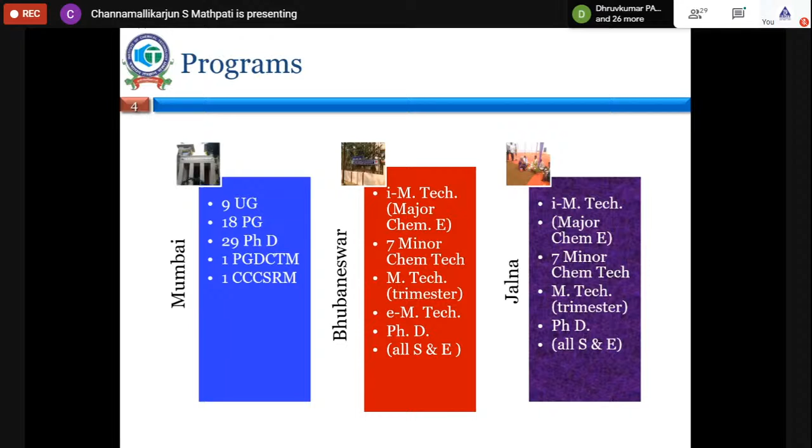This is a brief background about our institute. For more details, you can visit our website. Now let us come to the topic.

Today we are going to discuss the CFD application in multi-phase flows, and we are already on the 4th day of this particular workshop. All of you know what computational fluid dynamics is and its applications as well.

I'll just briefly start by saying that computational fluid dynamics is a study of fluid flow and heat transfer, and if you want to do multi-physics type problems, you can also incorporate chemical reactions and surface activity like interfacial tension. So there can be many complexities added into a CFD framework.

Why is CFD popular? Because it is a numerical experiment that we are performing, so there is no need for hardware infrastructure. Having a hardware infrastructure and doing experiments is going to be time-consuming and, economically, not a cheaper option to conduct.

So CFD can be a very promising alternative tool to reduce the number of experiments. But we cannot say that experiments can be completely avoided just because of the complexities in fluid flow systems.

CFD has progressed over the last few decades, thanks to advances in supercomputing and numerical schemes. Without improvements in supercomputing, the CFD field could not have progressed to the extent it has in the present day.

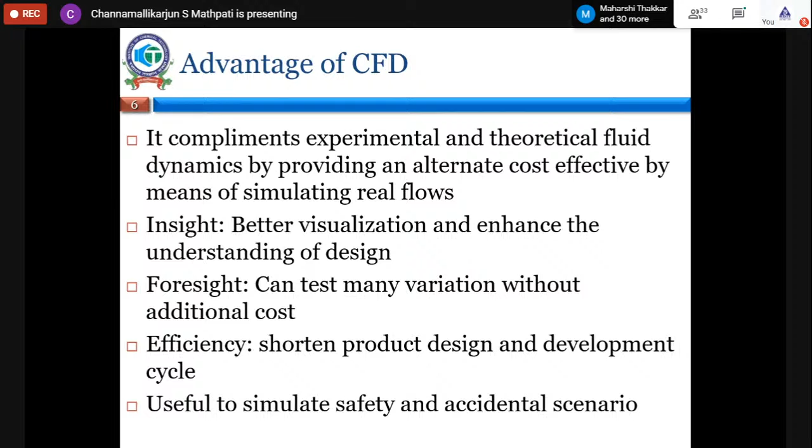In chemical engineering, computational fluid dynamics is mainly used for flow problems such as distribution of liquid in a reactor or a network of piping systems, understanding pressure drops in the system, evaluating and quantifying drag forces, and the non-idealities in the system.

There might be certain zones which are not at all moving. If you consider flow past a backward step, a very simplified flow, on the wake or backside of the step you can see a swirling flow, and in the middle and at the corner there can be a stagnant zone which is not at all getting mixed with the bulk of the flow.

There can be flow situations such as channeling and residence time distribution. Consider a column packed with certain packing or beads, and if you put a liquid or gas in that, our expectation is that the entire amount added as a pulse should come out as a pulse at the end of the column. There should not be any non-ideality in the system.

But any real life system with finite viscosity, when you add a pulse, it will come out like a Gaussian curve—there is a spread. Quantification of such spreads is very essential in reliable design of equipment. CFD can also handle reactive systems and particle dynamics.

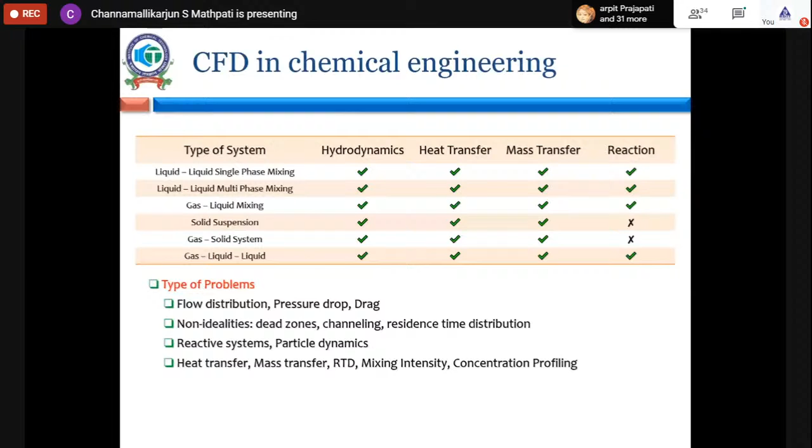When we do any CFD modeling, we essentially do it in three steps. The first is the pre-processing step, in which we define our computational domain. For any particular task assigned to us, we make certain assumptions, and based on the assumptions and required details from the flow field, we decide the boundary of our domain.

For example, I am working on a gasification system, a circulating fluidized bed gasifier. My domain extent will be just the circulating fluidized bed gasifier. I am not going to account for the compressor giving gas into the system, or the pneumatic transport of solids putting solids into my system. My focus is only on the gasifier equipment. That is how we decide our geometry.

Then we decompose our geometry into multiple grids—that is the grid generation stage. Then we give the boundary conditions and decide the physical and chemical phenomena to be modeled in the system. All these activities may take about 20 to 50% of your project time.

The next step, which is more time consuming, is once you have taken all these decisions, the computer has to solve those equations. The partial differential equations are converted into algebraic equations when doing computational fluid dynamics, and those equations are solved using iterative methods. These iterative methods actually take up a lot of time, and after the solving stage is completed, you have a converged result.

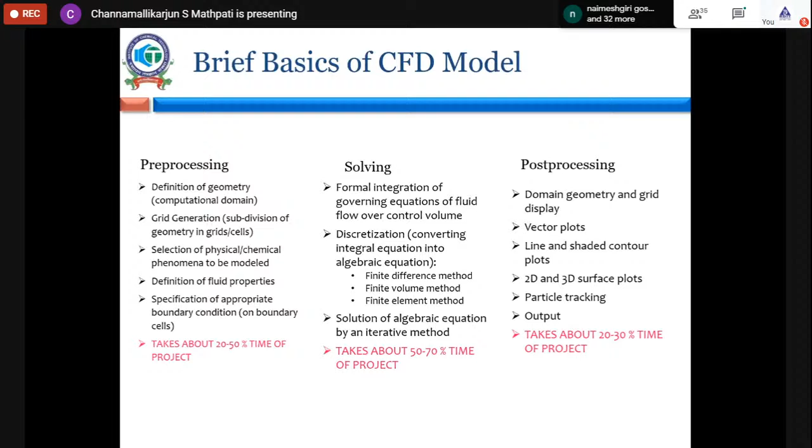As we have discussed, there can be different types of multi-phase systems, and in chemical engineering you can see various equipments being used. It can be a reactor or a distillation column, or a boiling system, or a vapor compression system. There are many systems in chemical engineering and chemical industry which essentially involve multi-phase contacting. These systems need to be designed appropriately in a safer manner so that we can have consistent product quality, as well as more throughput from such equipments.

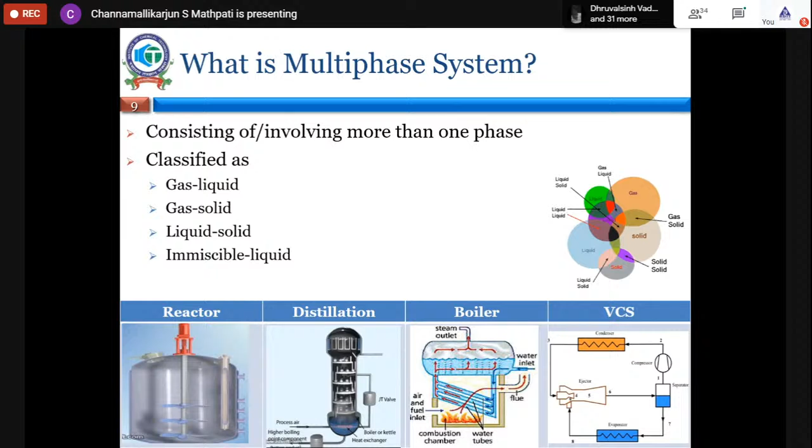All multi-phase flow systems have different flow regimes based on the properties of the gas, solid, and liquid phase, as well as the operating conditions. So if you consider a gas-solid flow, if you have a very low gas velocity through the bed, then it is just a fixed or packed bed type of system.

If you slowly increase the velocity, you will see gas bubbles coming out from the system. If you further increase the velocity, rather than bubbles, there are slugs moving in the system. If you further increase the gas velocity, you enter into turbulent as well as fast fluidization. If you go to the other extreme, the particles rather than remaining in the system just get pneumatically conveyed with the gas phase, since the gas has sufficient momentum to take away all the particles from the system.

So we need to understand exactly under which flow regime we are operating, and whether operation under that flow regime gives us benefit in terms of improved transport phenomena.

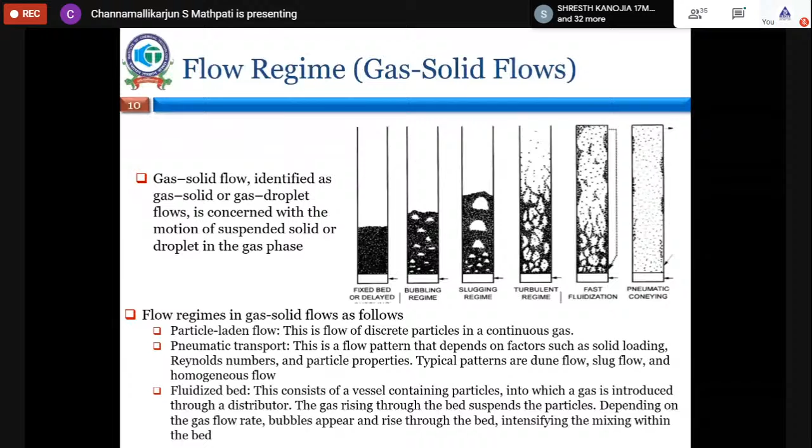Another system is gas-liquid flow. Again, there are different flow regimes like bubble flow, slug flow. There can be stratified flow, dispersed flow. Based on the flow conditions and material properties, you can get into various flow regimes, and all these flow regimes have completely different pressure drop characteristics, as well as different contributions to overall heat and mass transfer.

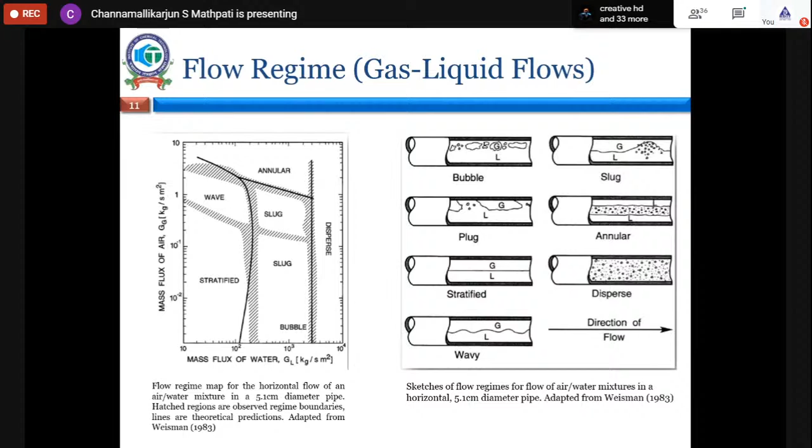So what are the various ways by which multiphase systems are modeled in computational fluid dynamics? The primitive way of handling multiphase systems is using empirical correlation.

Consider I am trying to design a fluidized bed system. To design it, I will use the Ergun equation and apply the force balance in terms of weight and pressure drop, and then derive the equation for minimum fluidization velocity. Once I derive that equation, I will decide my operating velocity as 2 or 3 times the minimum fluidization velocity. Based on the velocity decision and the total flow rate we are handling, we get the diameter of the column. Then based on the bed expansion characteristics and certain extra height, we decide the height of this fluidized bed reactor.

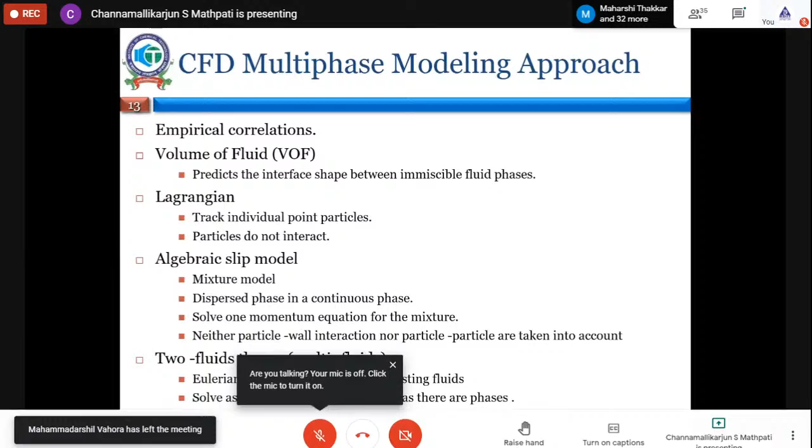So this is an empirical way of dealing with this problem. Another case is when a gas is going to fluidize my particles, and I want to see how the gas bubbles or slugs are moving in the system, so I want to track the interface between the solid and gas.

This interface tracking is done through a method called the volume of fluid method. This method tries to capture the interface between the gas and solid, and tracking the interface demands a very fine grid and very small time stepping. So a simulation using the volume of fluid method can give very good information about the system, but the problem is it may take a couple of years to solve for an industrial scale reactor, which is not the promising time scale that we want.

Hence we do some approximations about the system, and these approximations can be based on the percent of solid concentration in the system. There are two extremes: one is you are handling a dilute system, and the other extreme is you have a dense bed system.

If you have a dilute system, then for the gas phase you solve the Navier-Stokes equation, and for the solid phase you solve Newton's law. So what you are doing is tracking each and every individual particle in the domain, and tracking every individual particle while solving the gas phase as a continuum is a Lagrangian type of approach.

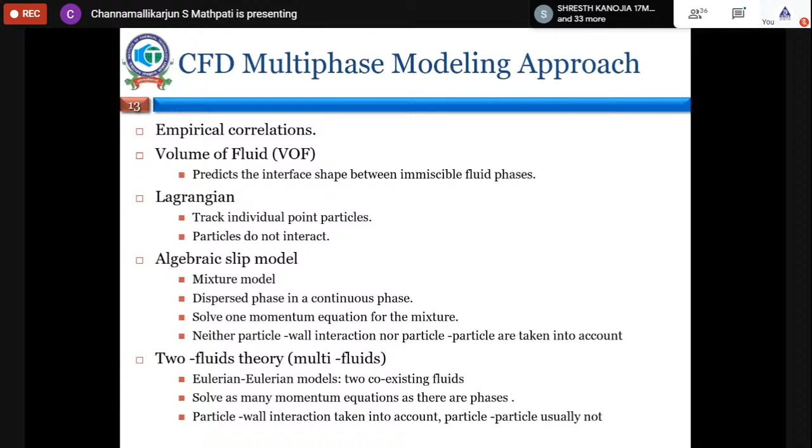The Eulerian-Eulerian framework is mainly used in most CFD multiphase applications. Its features are that you use a single pressure field for both phases, or any number of phases in the system. So you don't define pressure for the solid phase and gas phase separately. You only have different velocity variables for gas and solid, but pressure is common.

You use interphase drag formulations, and in few cases you may also want to include the virtual mass effect and the lift forces.

In case of a gas-liquid system, the gas bubbles can get drifted in the radial direction as well, and this drifting is actually due to the lift force. Whenever these bubbles are moving upwards, in their wake, that is the backside of these bubbles, they also get some liquid attached, and this liquid wake is also moving with the bubble.

So under such gas-liquid systems, these forces are important. Then you can also add additional complexities, such as species transport or reactions taking place, and you solve the system. Once you solve these systems based on the velocity and pressure information, you can get design parameters such as heat and mass transfer coefficients. If the system is turbulent, then you also add the turbulence equations in addition to the continuity and momentum equations.

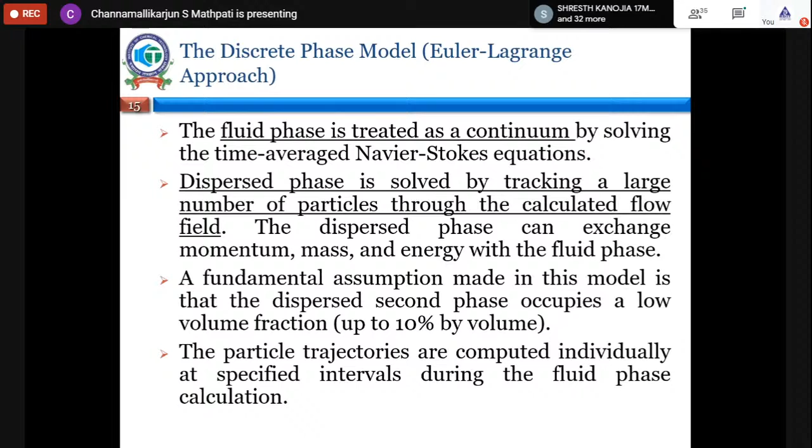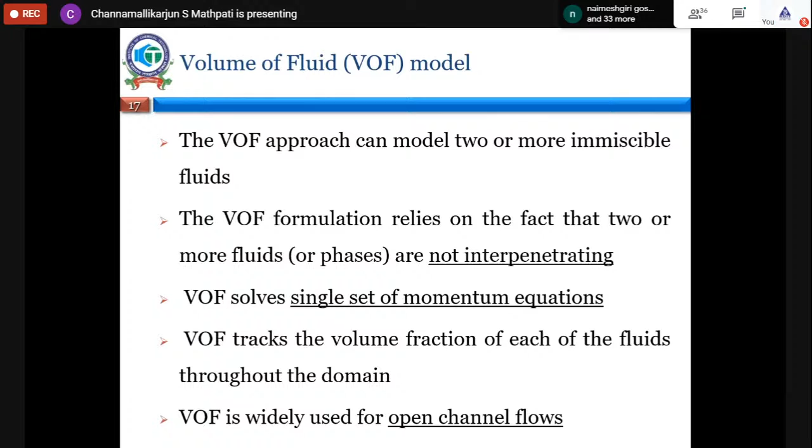In case of VOF, what you do is consider that both phases are not penetrating into each other, and you solve an additional equation which tracks the interface of the continuous and dispersed phase. So VOF solves a single set of momentum equations, but it solves an additional equation related to the interface.

So if epsilon k is 0 in a particular cell, it means only one fluid is there. If epsilon k is 1, then the other fluid is there. And if it is between 0 and 1, then both phases are present in that cell. So you solve for each and every cell in the domain, whether gas is present, liquid is present, or both are present, and if both are present, what is the proportion. Based on that, you track the interface.

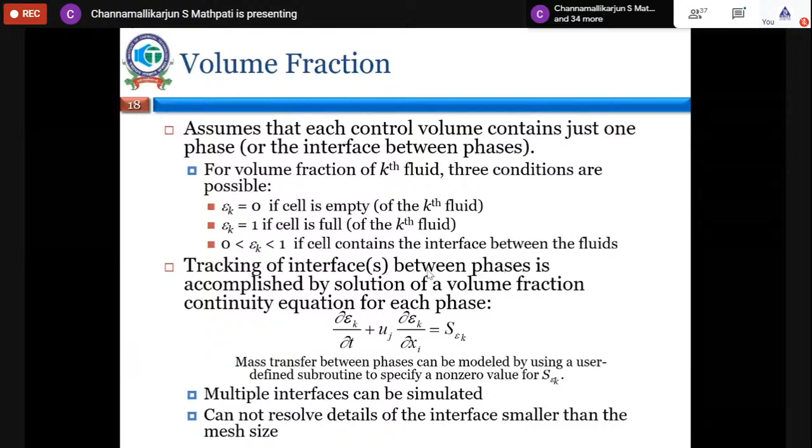Typical VOF problems are jet breakup type problems, and the motion of large bubbles, because large bubbles can oscillate, they have elliptical and cap-like shapes, and if there is significant liquid velocity as well, then there can be breakup of those bubbles. So there are a lot of things happening at the interface, and this is the interface from which mass transfer takes place, hence it is really necessary to understand the impact and contribution of such motions on the overall rate of mass transfer.

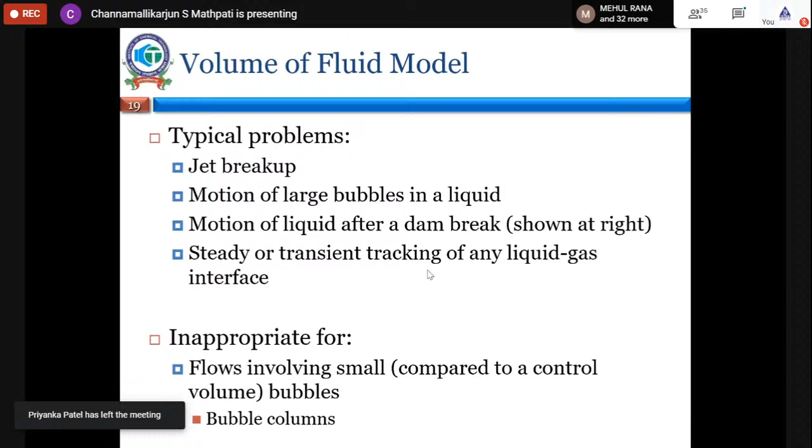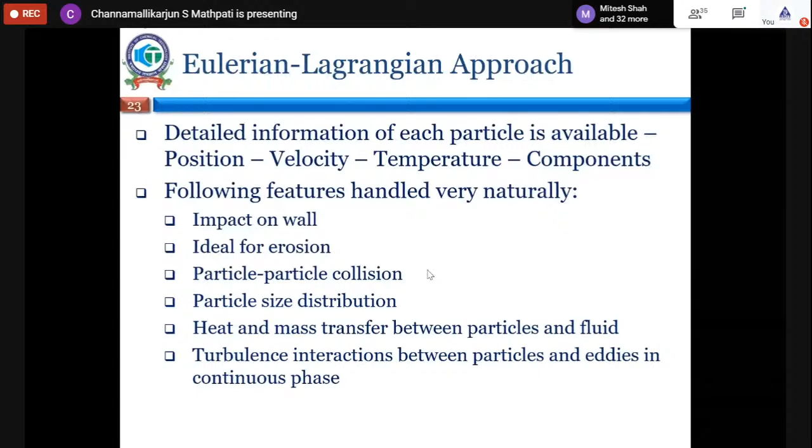Now there are certain limitations as well, which we will discuss when we take the actual case studies. So let us start with our first case study of a solid-gas fluidized bed system.

Fluidized beds are widely used for gasification of coal, biomass, etc. Gasification technology has recently become very popular just because it helps handle pollution. If you try to burn biomass or coal, direct burning is going to be inefficient because it is a partial burning, and it releases carbon monoxide as well as other toxic gases based on the constitution of the material used for burning. So rather than burning these things, if we gasify them, in gasification we form CO and hydrogen mainly, and there will be a certain extent of CO2 as well.

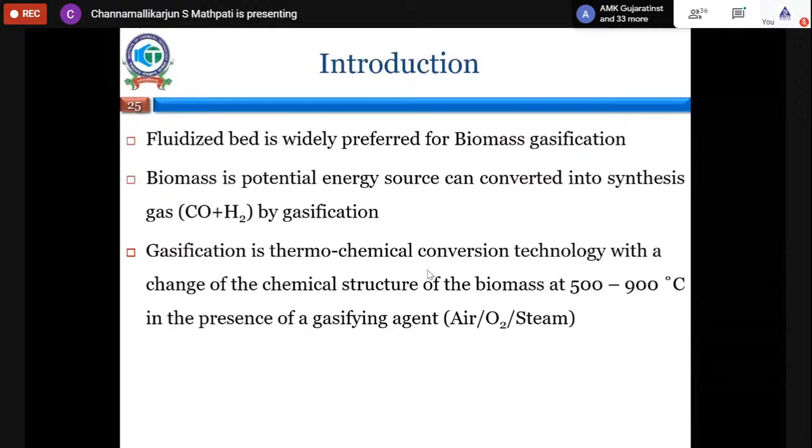This CO and hydrogen are very useful either as a fuel itself, or it is also useful to produce other chemicals. There are many chemicals that one can produce using a gasified product, that is syngas. You can do ethanol production, Fischer-Tropsch synthesis, or go to naphtha, gasoline. Any refinery product that you get from crude oil can also be obtained using syngas chemistry. That is why this syngas chemistry and gasification is very popular, and large scale industries are trying to have such technologies.

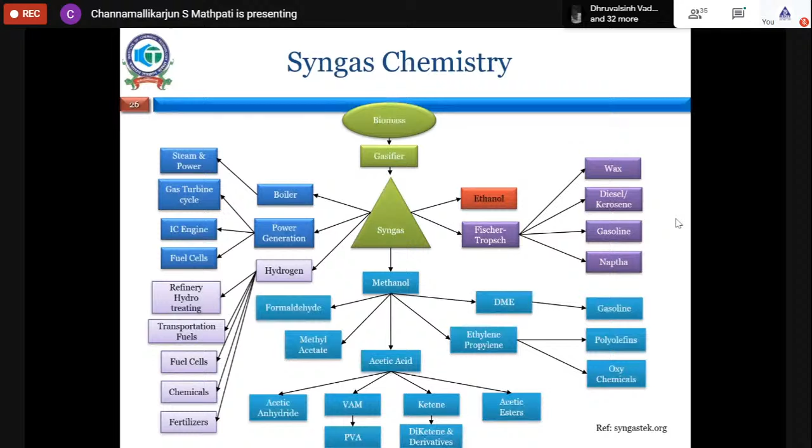To have this gasification, there are various equipment designs. The simplest design is a circulating fluidized bed. There are modified designs such as dual bed gasifiers and other types. There is an upflow type of gasifier, downflow type, crossflow type. So many designs are available, and all of them have certain advantages as well as disadvantages.

In case of gasification, there are different chemistries that take place. If you take biomass gasification, the first step is the release of volatile gases. What are these volatile gases? It can be water itself, present in the biomass, and certain other volatile gases which might be there. So the first step is drying and pyrolysis, and once you dry and pyrolyze, you get char, tar and volatile gases.

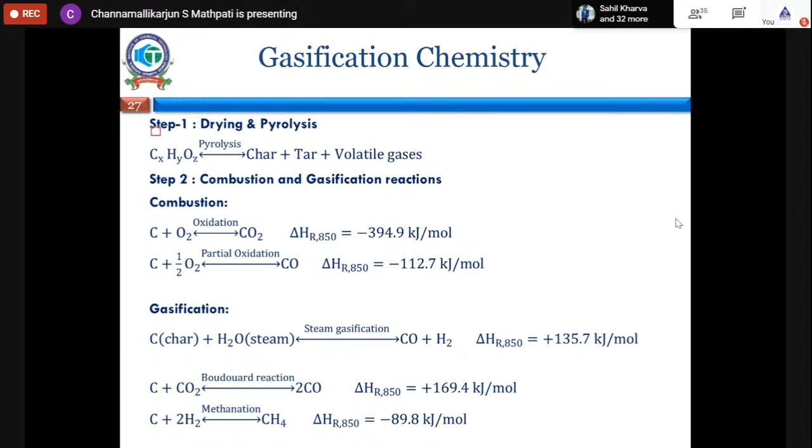In the second step, whatever char and tar is available gets oxidized to form CO2 as well as CO. Then the carbon from the char also reacts with the steam added to the system, giving carbon monoxide plus hydrogen. Other chemistries can also provide methane. The CO and H2O can react to form CO2 and H2. So essentially what all these reaction schemes suggest is that after gasification, you get carbon monoxide, hydrogen, CO2, methane, and certain other gases based on the content of the biomass.

Now let us see a design of a dual bed gasifier, and we are going to do a CFD analysis of this particular system at a pilot scale. A dual fluidized bed gasifier is energy efficient because the combustion zone and gasification zone are separated.

Any gasification product is going to contain CO2, CO, and hydrogen, but the CO2 is as such not useful in the applications that we have. So we do not want to dilute our carbon monoxide hydrogen stream with CO2. These gasification reactions happen at high temperature, so in order to provide this high temperature, we have to do certain burning of the fuel.

So in a dual fluidized bed gasifier, the burning part is done in a separate column, just like a fast fluidized bed type of system. There is a riser type of system available here. A heat carrier solid material from the gasifier zone comes to the combustion zone, where some combustion takes place. The combustion gases provide heat to the heat carrier material like silica. This silica particle again goes back to the gasifier, and its heat is utilized for the gasification of biomass, and from the top you get the gasified products in this system.

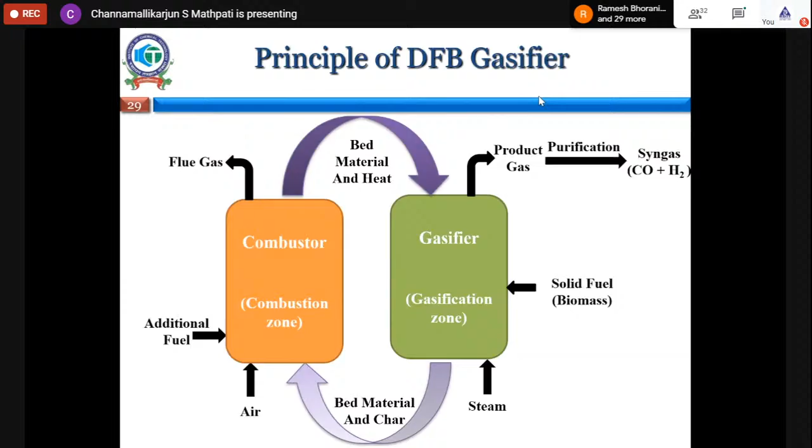This is a schematic diagram of a dual fluidized bed gasifier. The red portion is just like an entrained flow system where the heat carrying material like silica comes and moves fast, with a residence time of just a few seconds, taking heat from the combustion. Then the combustion products, gases, and silica particles come to the top, where there is a cyclone separator. The flue gas, mainly containing CO2, water, etc., goes out of the system, and these hot solid particles fall through this hopper into the gasifier zone. This gasifier is also in a state of fluidization, and it receives heat from the silica particles, and gasification takes place. This is how the circulations are maintained.

While circulations are maintained, this loop seal arrangement is very important, because the loop seal avoids the biomass going towards the combustion zone, as well as avoids the combustion gases directly entering the gasifier zone. It is just like a mechanical valve in the system, and it is actually controlled by manipulating the velocities in the gasifier, supply chamber, and recycle chamber.

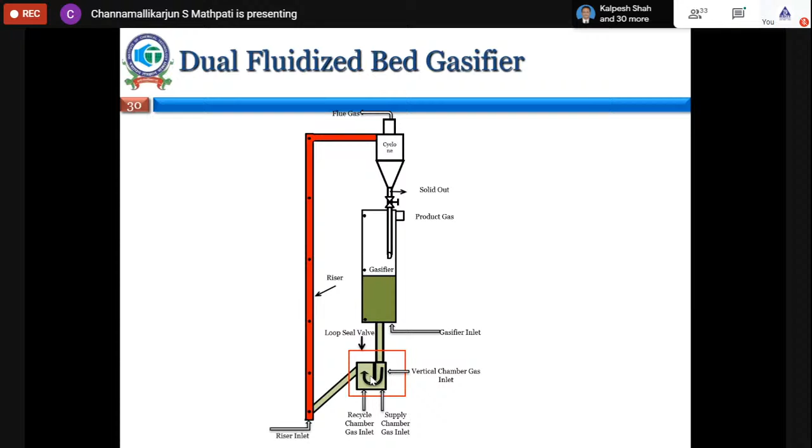So this is the actual cold flow prototype we have in our lab, and the prototype is essentially for validating the CFD simulation. The validation of CFD simulation has been done based on the pressure profiles by putting pressure sensors at regular height, as well as the solid circulation rates which are obtained by manipulating the gas flow rates.

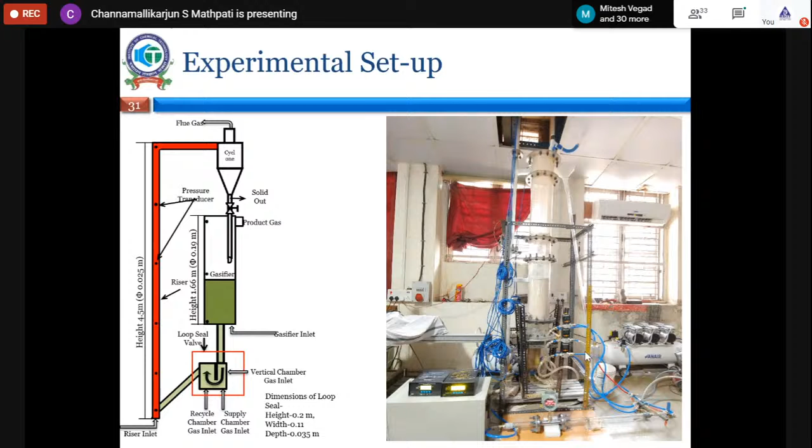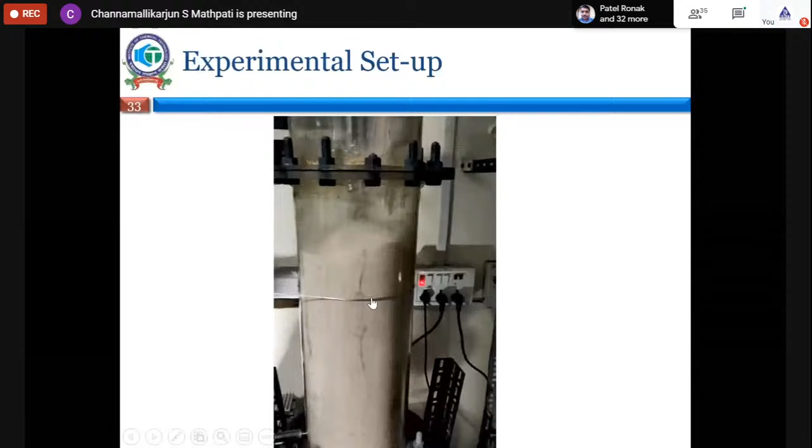So here you can see the actual operation of this gasifier. This is the gasifier zone, and at present no gasifier material is added. This is the heat transfer material, which is silica particles which we have in the system, and this is the connection coming from the combustion zone. So you can see solid particles are falling in this particular zone.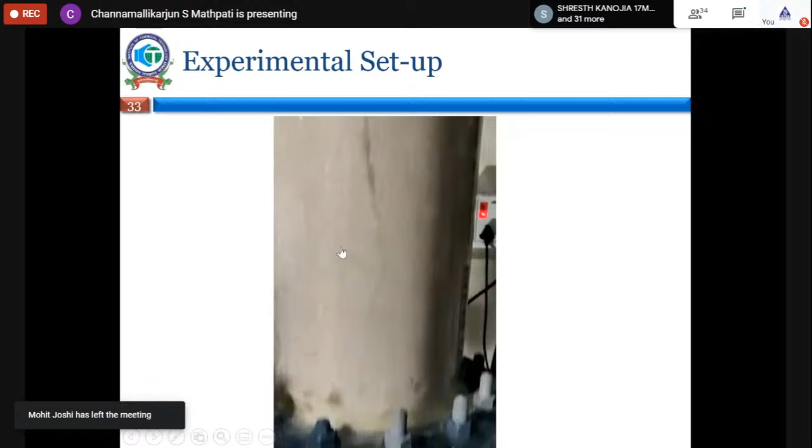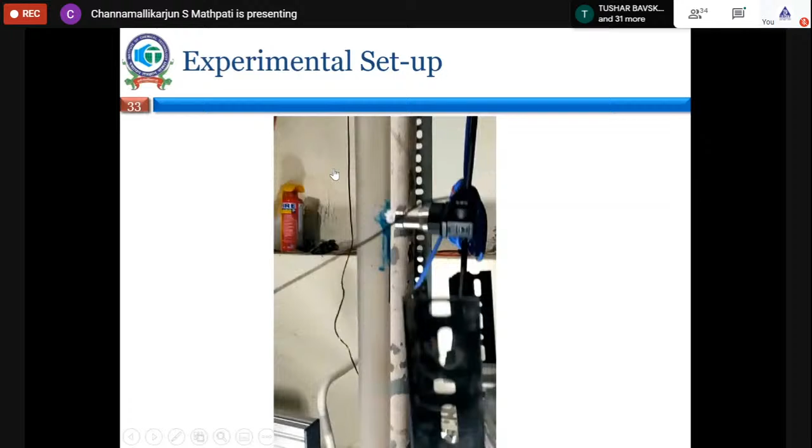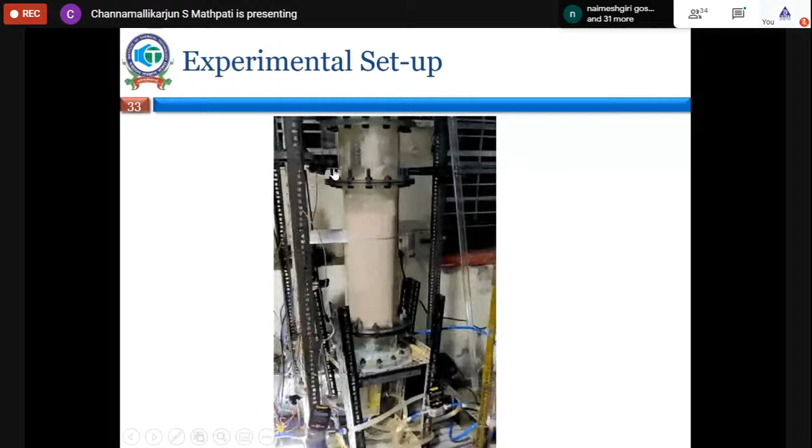Near the loop seal, the material is coming in. From there, it is going to our combustion zone, which is just like a fast fluidized bed system. So this is how a material solid circulation is established in the system by manipulating the gas velocities. There is no valve which we are opening or closing.

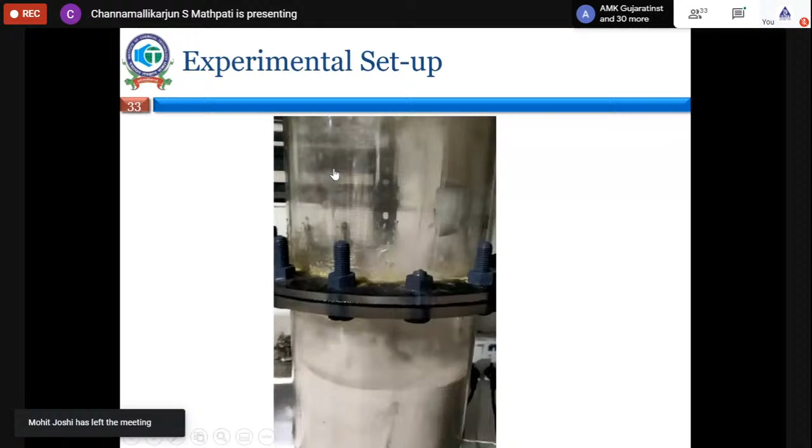It is just the action of the gas flow rates which is helping us to establish this circulation rate. So this is going to be a very complex phenomena to be captured by CFD, and hence the validation is very essential. So various experiments were done, and the data is collected. All this data is used for the validation of the CFD model.

Now, if I decide to go ahead with the first type of modeling, just using correlations and designing the system, you can see the problem with that. In literature, there are almost 15 different correlations for prediction of minimum fluidization velocity, and these correlations predict the minimum fluidization velocity from 0.1 to 0.4. So almost 300-400% error is there in terms of the correlation predictions for designing the system.

So this much deviation or error is not acceptable in our engineering practices, and hence we go towards doing the computational fluid dynamics. So correlation based methodology of designing the system may not adequately work for this type of problem.

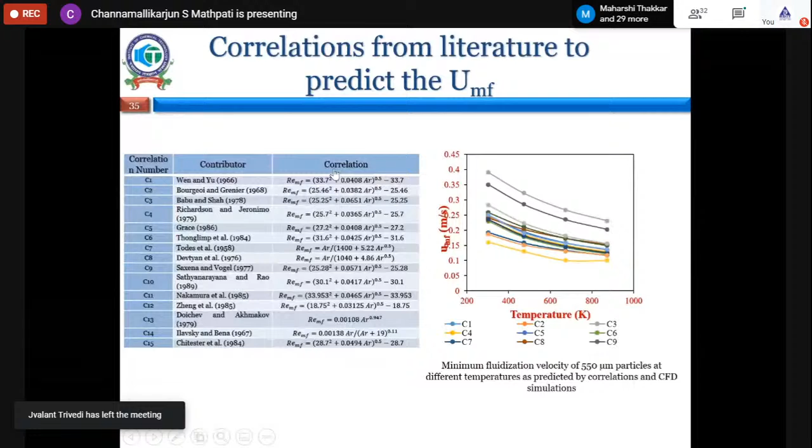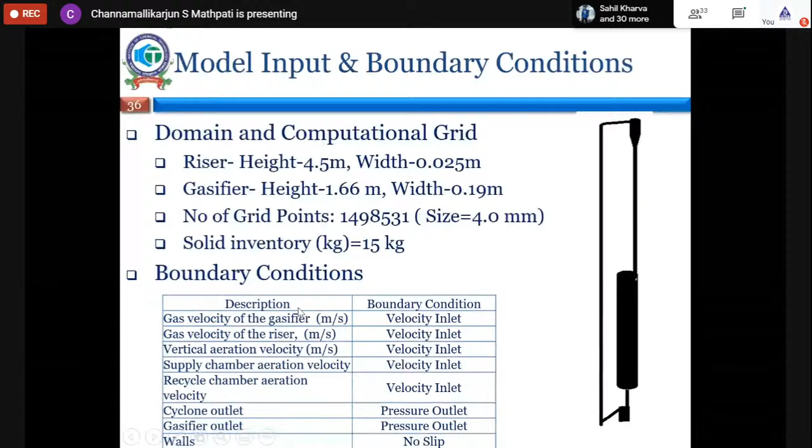So various boundary conditions for the system are also given here. In this case, the number of grid points used is about 15 lakh grid points. And this is done in a Eulerian-Eulerian framework, which means you are solving for both the phases - equation of continuity and momentum balance equations are written for each phase.

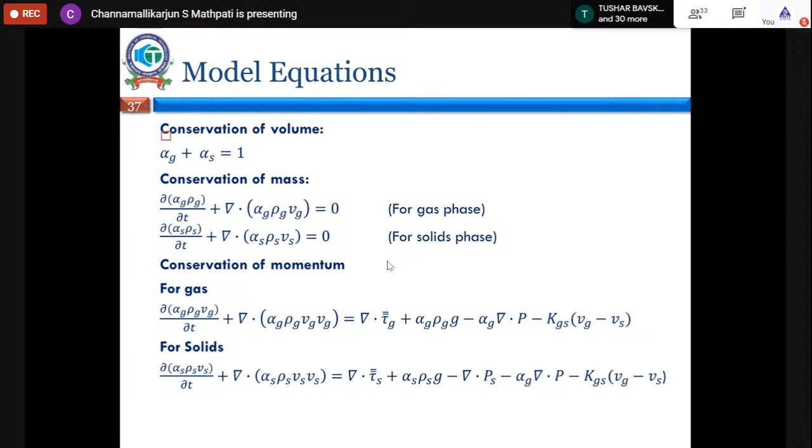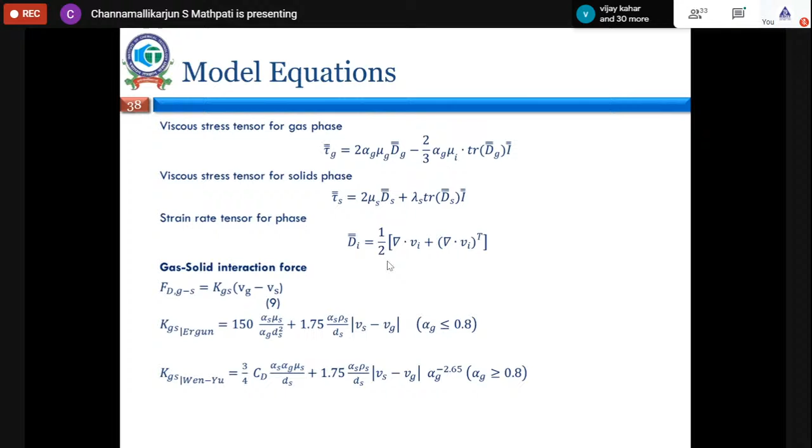Then you make a decision about what kind of drag model you want to use in the system, and you may also check the sensitivity of the drag model on the prediction. I will not cover that in detail, but drag model selection is also one of the tasks in doing multi-phase computational fluid dynamics. For the present case, the drag model given by Gidaspow was used, and for turbulence modeling, we had used standard K epsilon.

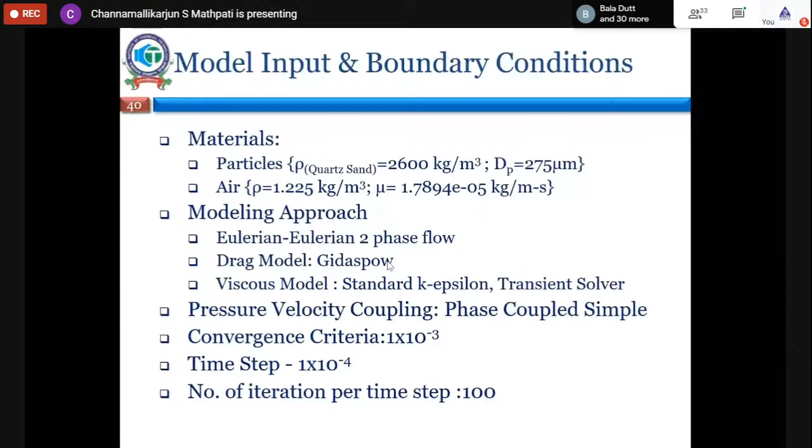So the first step in any computational fluid dynamic problem is to check whether whatever grid resolution we are using is sufficient or not. To check this, you can either compare with available experimental data or keep making the grid resolution finer until the results from two different simulations with different grid sizes overlap on each other. In this case, grid spacings of 3.5, 4.5, 4 were used, and it was observed that a grid size of about 3.5 mm would be good in terms of the accuracy of the solution.

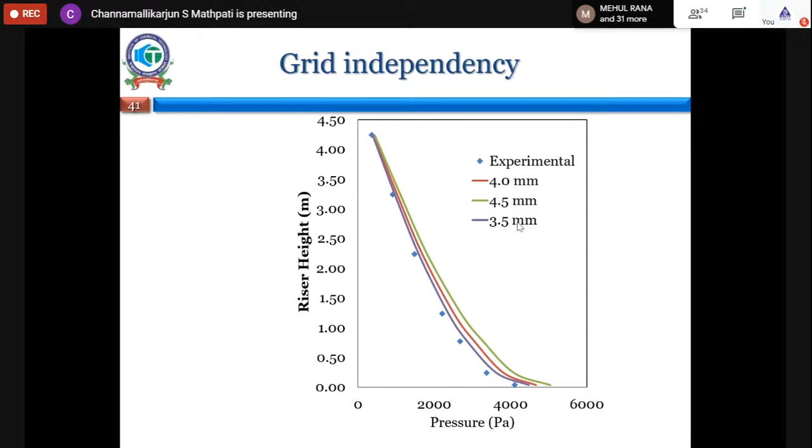Then we validated with respect to pressure profile at different velocities as well. So the first validation was for grid independency. The second validation was in terms of changing the operating conditions and then comparing it with the experimental data. We could observe about 20 to 30% error in the data, but that is within engineering accuracy. So we accepted the solutions and went ahead with the further design.

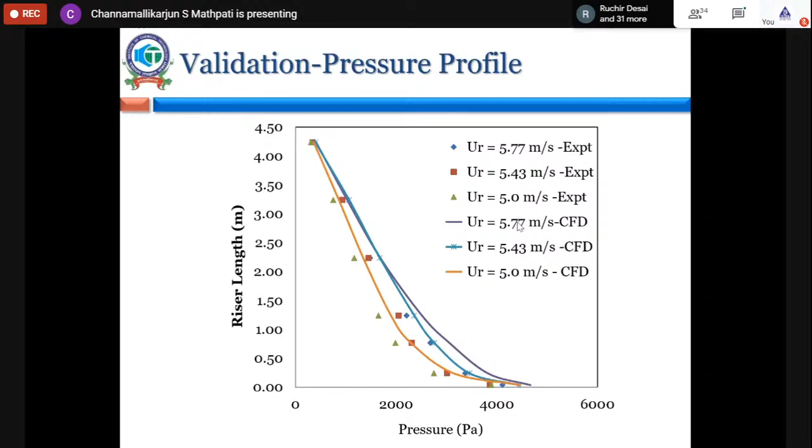Then we estimated the holdup of solid phase and gas phase with respect to the riser height.

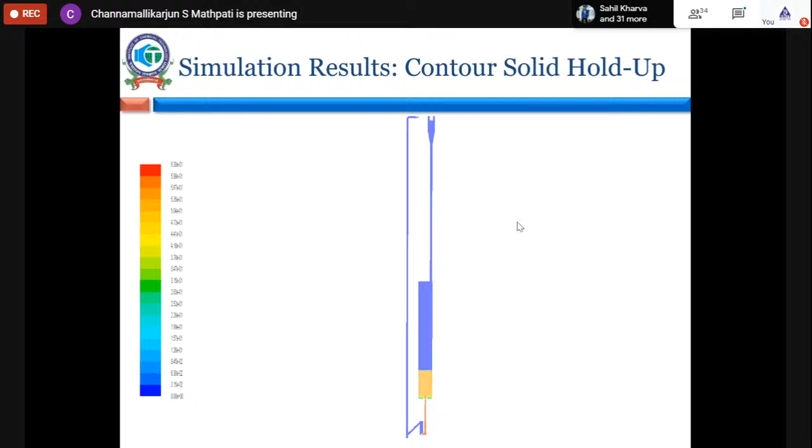So in a Eulerian framework, we could get very good visualization in the system. I have shown a very small video here showing how fluidization takes place in these systems.

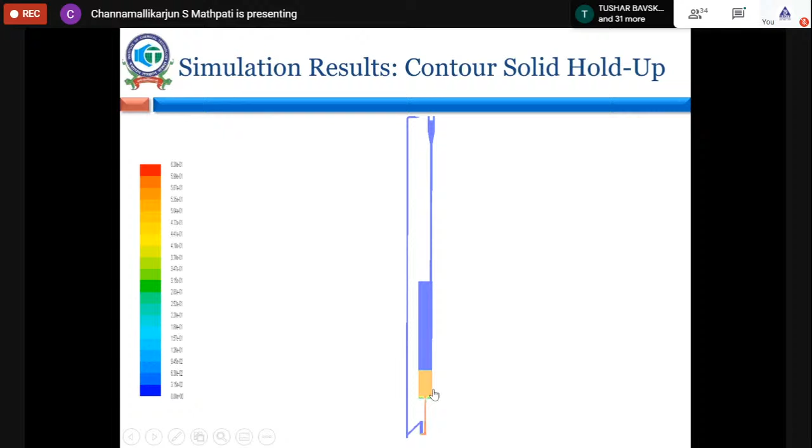Next is the design parameter. In case of dual fluidized bed gasifiers, the major design variable is the solid circulation rate, SCR. This is important because these solids move to the combustion zone, take up the heat, and return to the gasifier zone. If you have a very good solid circulation rate, there would be more heat transfer, which helps faster gasification.

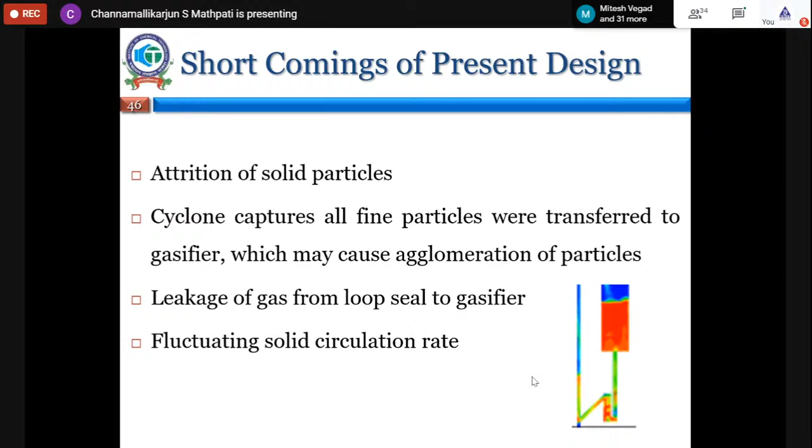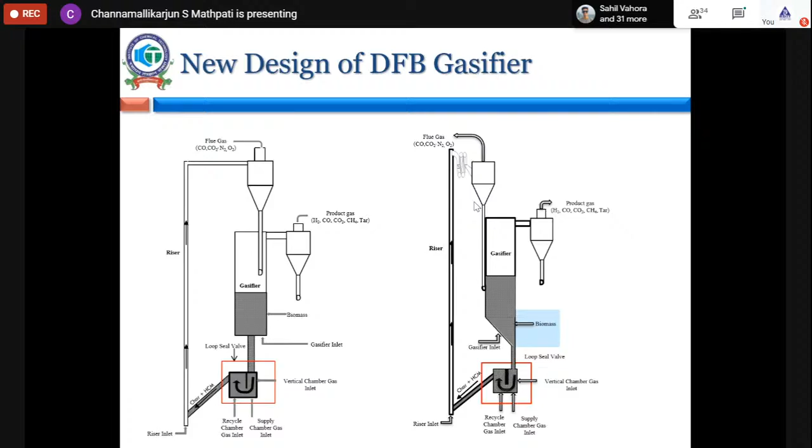There are two different designs of dual fluidized bed gasifiers which we evaluated, with modifications in terms of the main gasifier geometry as well as near the cyclone separator. These designs have now been optimized and certain recommendations have been made, since it was a validated model, along with solid capturing at the top.

This particular portion, this design, has been validated by doing a Lagrangian simulation for the cyclone separator, which I have not covered here, but this part is independently modeled using Lagrangian simulation and optimized. The loop seal arrangement has been optimized using the Eulerian-Eulerian simulation framework.

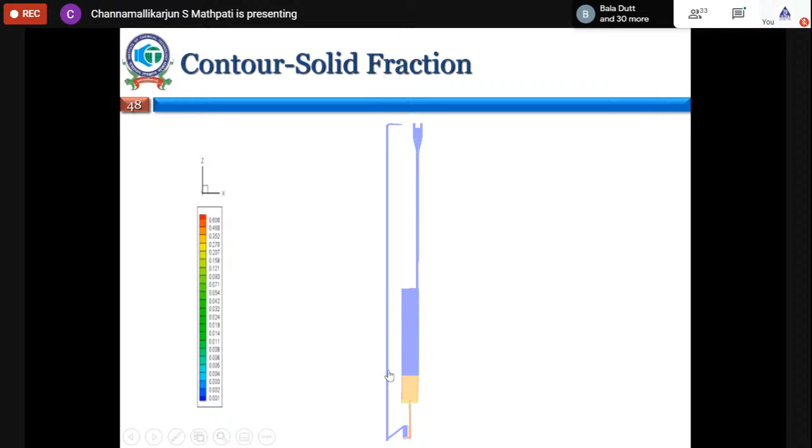Another design I want to discuss next, I will quickly rush through, and then move towards the VOF type of validations.

This design is part of our collaboration project with BARC. BARC is actively working with a research group in France on the International Thermonuclear Experimental Reactor, a fusion reactor technology. In this reaction system, lithium titanate particles are used for generation of tritium, and it is proposed that a packed bed or fluidized bed system with lithium titanate particles be used for test blanket module.

The heat extraction is very important and is done using lithium titanate particles, which can be in packed or fluidized bed condition.

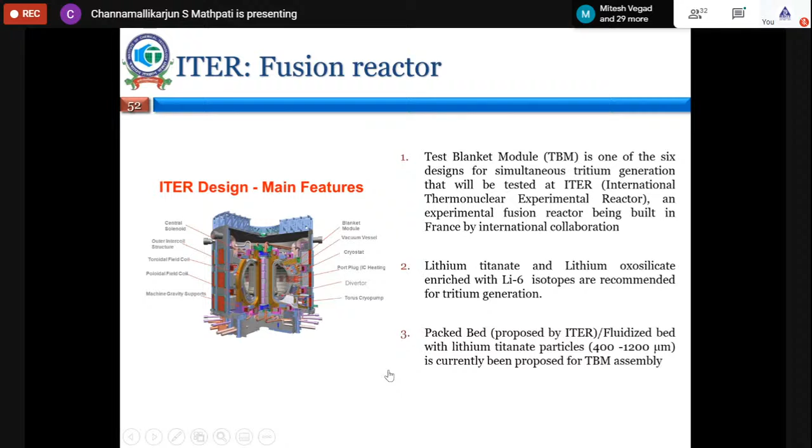But these particles are typically of Geldart B type classification, and fluidizing them is very difficult. If I have a packed bed instead of a fluidized bed, it is not a good heat transfer equipment, so the heat transfer rates will be low. So we are stuck in a problem: it is difficult to fluidize Geldart B type particles, and if we use a packed bed system, the heat transfer might be limiting.

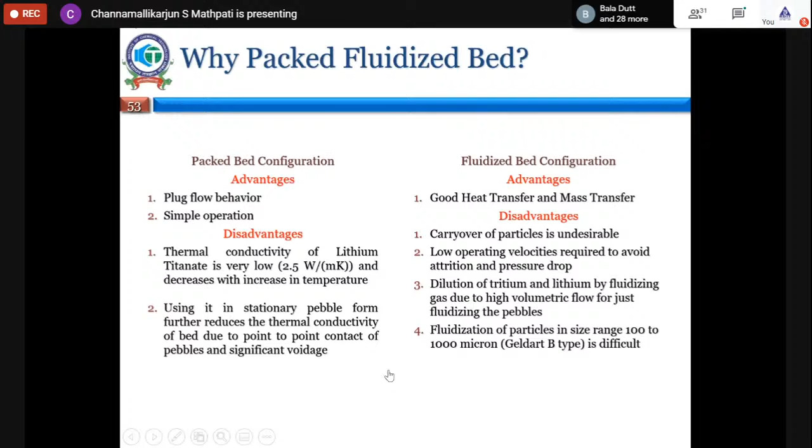Hence, a combination of both is proposed: a bed packed with larger particles, and in the interstices of these particles, we try to fluidize fine particles. So visualize a column filled with larger balls, and then you charge fine powder into that bed. This fine powder is fluidized by the incoming gas, which is helium gas, proposed to fluidize these fine particles in the system.

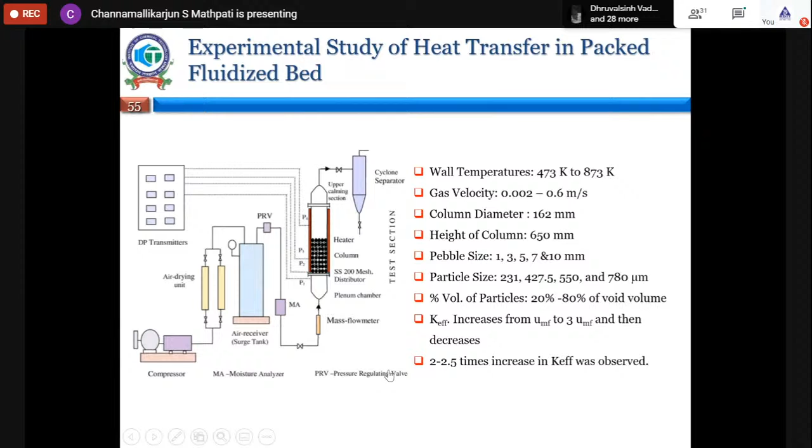Again, a stepwise methodology would involve certain experiments at lab scale, using that data for validation. But now we have a system with large particles. So during geometry generation itself, we have a column, put large particles in it, and delete the volume occupied by the large particles, because we are not interested in that volume. What we are more interested in is the void space of the large particles, and how the small particles get fluidized there. That is why you patch it.

So we have patched the fine particles in this bed, and with respect to different velocities, we fluidize this bed and validate it with experimental data. This is again a gas-solid type of system, but a completely different application area, as well as a completely different way of geometry generation and simulation.

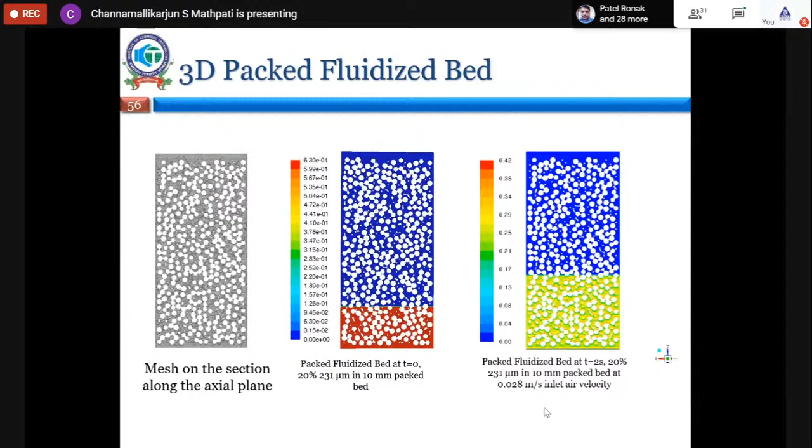Again, we validated with respect to pressure drop, and parametric studies were carried out. Then heat transfer aspects were also studied once we had validated this in terms of pressure drop characteristics. Heat was supplied near the wall using electrical heating, and the temperature profiles that develop in the system have been modeled.

So this is a multi-phase system with heat transfer, one more physics added to this. Again, the volume fraction of the air phase and the particle phase is examined. This CFD tool is very helpful in terms of visualizing the system as well as quantification of design parameters such as pressure drops and heat transfers.

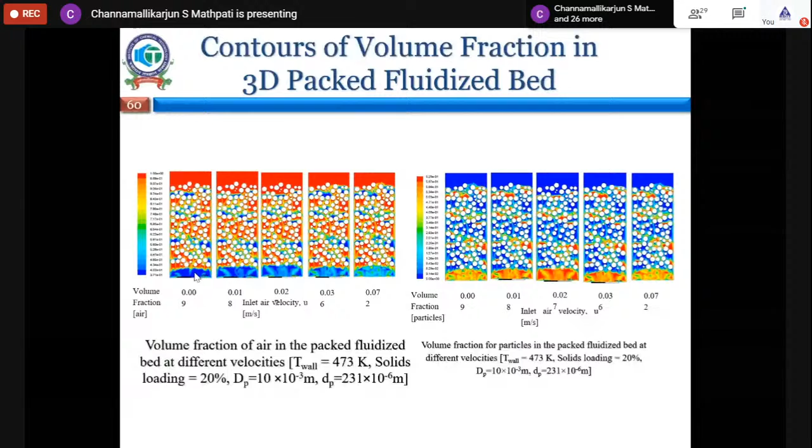You also get the temperature profile along the radius, which gives an indication of localized heat hotspots. If these localized hotspots have a safety concern, then you can develop a new design to avoid such hotspots.

Next is a solid-liquid system. This is a typically used chemical engineering equipment, the stirred tank, in which you want to suspend solid particles. It can also be a pharmaceutical application where you want to suspend crystal particles in crystallizers, or extracting essential components from herbal products, like extracting essential oils. So what you are doing is a leaching operation, which again is a solid-liquid operation.

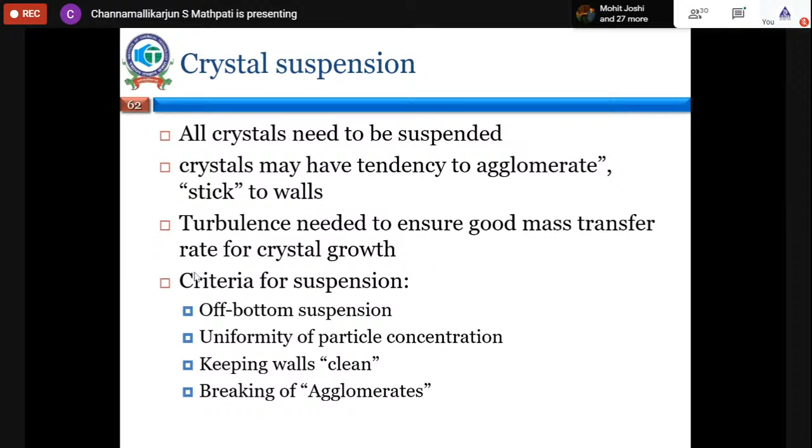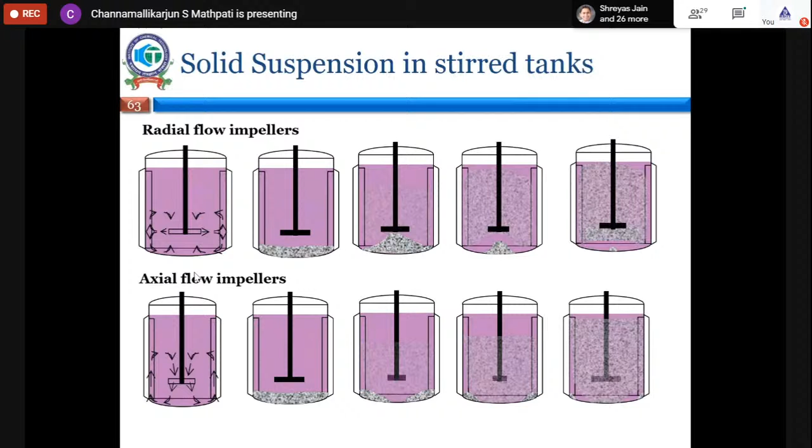There are multiple scenarios where we encounter such systems, and it is important to suspend the solid particles. To do so, we use agitators, but the type of agitator, the rotation speed, the clearance from the bottom, and the diameter of the agitator are all design variables that must be addressed for an efficient design.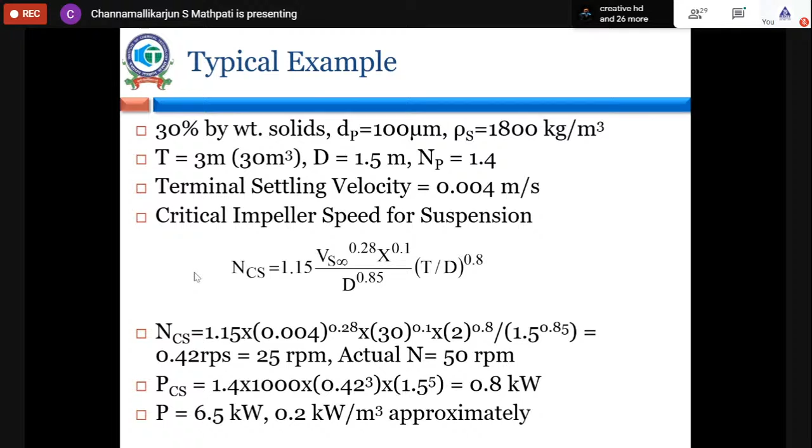If we go by the correlation based method, it may not give us an accurate and reliable solution—it can just be a starting point to generate a geometry for CFD studies. Detailed work has been done by one of the collaborators in our group. Murthy et al. has published that, comparing various types of impellers in terms of their power consumption for the same suspension application.

If you use two different types of agitators like hydrofoils, the power consumption is much less compared to using a disk turbine type of impeller, which indicates that there can be significant energy savings if an appropriate choice is made.

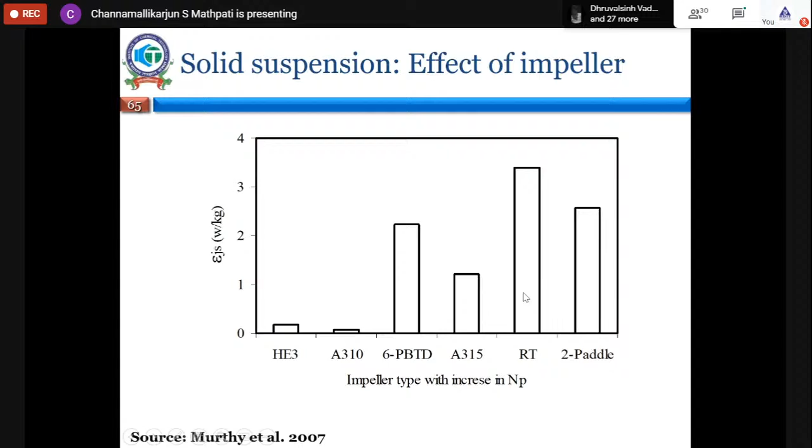So how do we do it? For suspension of solid particles, a nice framework has been provided by Professor V.V. Ranade from National Chemical Laboratory. He has quantified the suspension quality using computational fluid dynamics with the help of statistical methods. This is a multi-phase Eulerian simulation, where you estimate at every cross section the fraction of gas, liquid, and solid phase, and based on those fractions you generate the standard deviation, which tells you whether you have uniform suspension, complete suspension, or poor suspension quality.

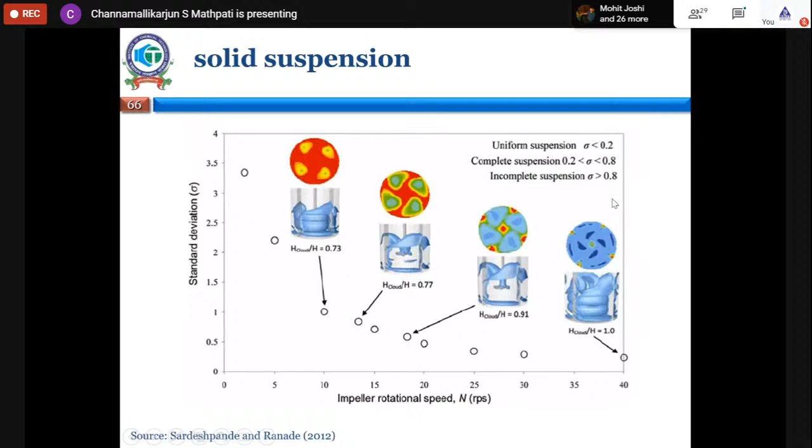So let us now move toward the volume of fluid method.

Do you want to ask any questions about gas-solid flows or the Eulerian framework, or should I continue with the VOF and complete the presentation, and we can discuss afterward? Let us first finish your part, and then if there are any questions, participants will ask you directly. Okay, sure. Thank you.

So another way of modeling multiphase flows is the volume of fluid method. In our group, we applied this VOF method to an interesting problem in chemical process equipment. Consider a pharma application where a reaction is carried out in a solvent like toluene. Once the reaction is over, you want to recover the solids by evaporating the solvent, so you apply heat through the jacket and the solvent vapors start coming out.

But the problem is, as the solvent amount in the reactor reduces, the effective area for heat transfer also reduces simply because the level is going down. So as the level drops, heat transfer also drops, and this takes a very long time to empty the reactor.

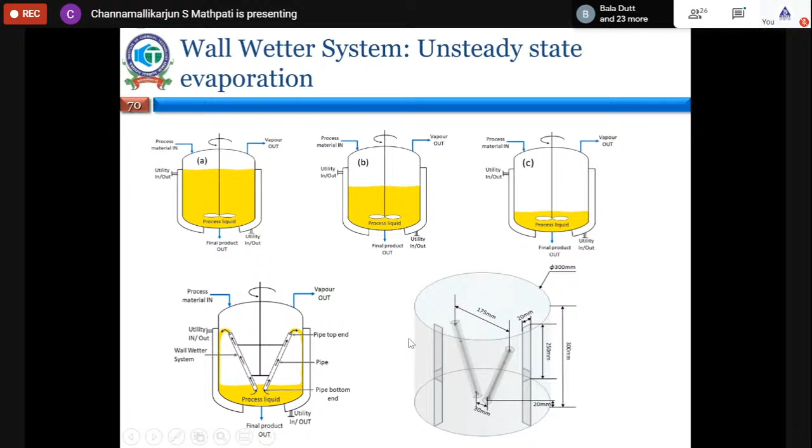Now this phenomenon of how the liquid is rising and how the jet is getting created and falls on the wall - we need to do a volume of fluid simulation. A simple Eulerian framework may not be helpful to me, because I want to track how the jets are getting created and then hitting the wall.

So to do that, again we created a computational domain, and as we are tracking the interface, the grid resolution has to be very fine. Hence you can see near this pipe we have very good grid resolution, both inside as well as outside.

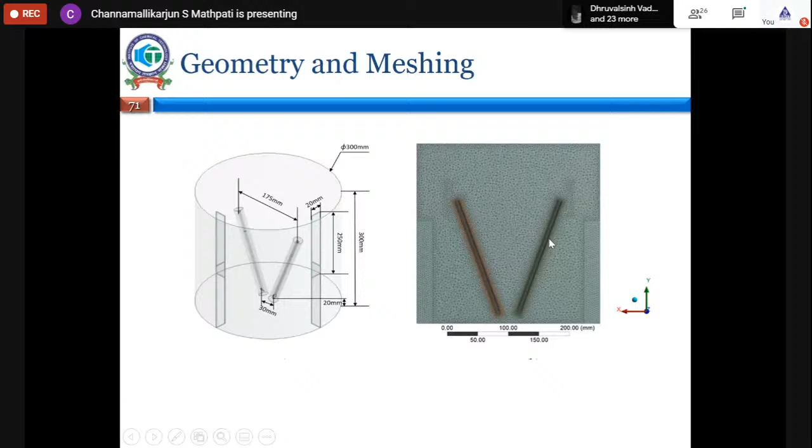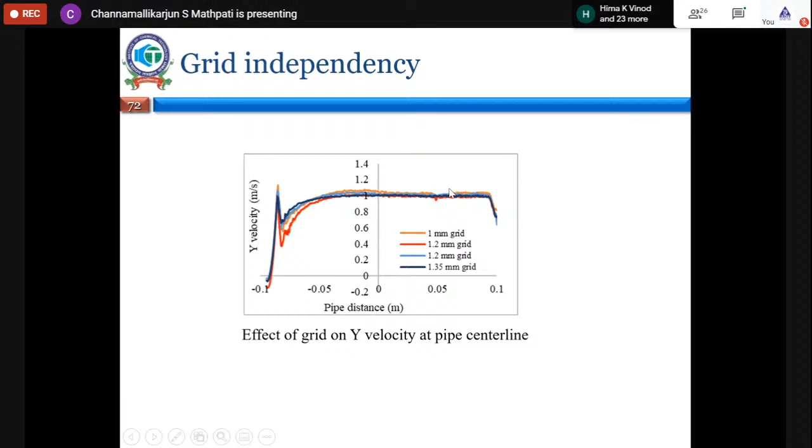The first step again is grid independency. Various sizes of grids were used, and then it was decided that when the results become independent of grid size, that grid size was continued.

Another way is, rather than having just two pipes which are rotating, we can just put a cone. So there is a cone in the system, and when this cone rotates, the liquid will climb on the inside surface of this cone and fall out onto the reactor wall.

So this is how a volume of fluid simulation is useful to track the interface as well as the breakup of jets, such kind of phenomena.

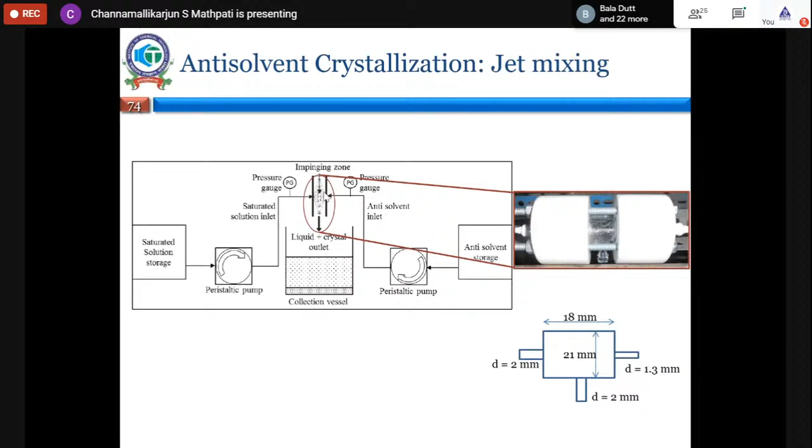At 4 meters per second, the jets were hitting each other, and after they hit each other, they were hitting the walls of the system. This caused certain back mixing, which gave higher particle size than expected. Beyond certain velocities, the jets hitting each other created a disk, and that disk diameter was almost equivalent to the diameter of the chamber we used, inducing non-uniformity in the flow and back mixing, which deteriorated the performance.

So by doing these simulations and understanding what we obtained, we modified the chamber design and avoided such situations.

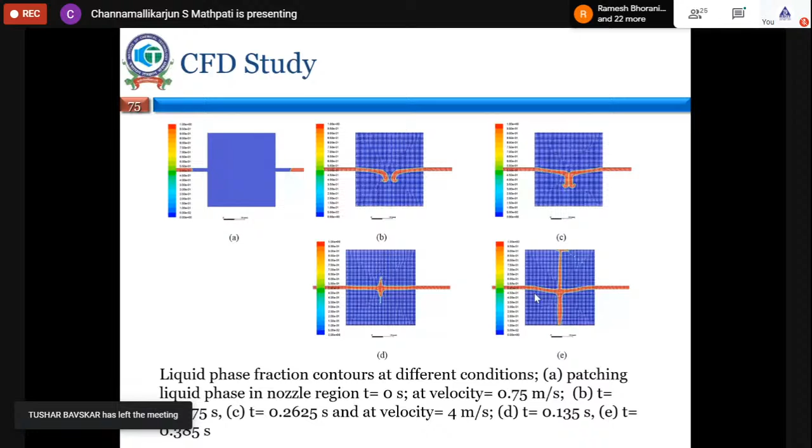So this is how the jets interact with each other. One jet is coming, another jet is coming, and this is the zone in which they are intimately mixed with each other, helping us achieve a very good homogeneous turbulence field, and hence we get a very narrow crystal size distribution. In pharma, it's important to achieve the size, and the distribution has to be very narrow. So this kind of equipment would be really useful to get that kind of performance.

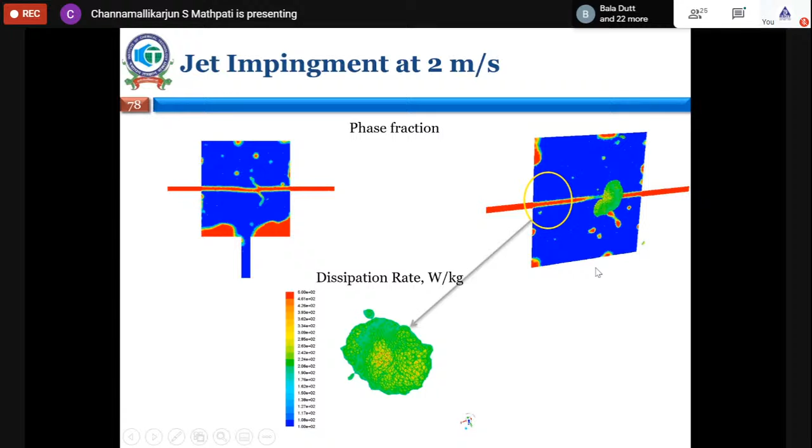So again, for the CFD results, we physically carried out the experiment, understood the disk that is getting created, and did the CFD simulations, trying to match at least the qualitative observations.

Then we will discuss the Lagrangian simulation. Lagrangian simulation treats the particle phase, rather than considering it as a continuum and applying the Navier-Stokes equation, we apply Newton's law and track all the forces acting on the body, then track the trajectory of those particles or droplets.

This particular study we did during the recent lockdown was about development of a sanitization tunnel, and the kind of nozzle we were using was a two fluid nozzle. If we had used a single fluid nozzle to spray the disinfectant solution, the consumption of disinfectant solution for getting complete coverage was almost 10 times more than using a two fluid nozzle. A two fluid nozzle helps us get very fine dispersion of liquid at lower liquid flow rate, because it mainly uses the momentum coming in with the gas phase to do the dispersion.

So there is a gas-liquid flow flowing through the nozzle, due to which certain drop size distributions get created, and the liquid consumption is extremely low compared to the actual consumption in standard single fluid nozzle designs. So we could create the dispersion.

Our objective was to determine whether we are covering the entire surface area of people walking through the system, whether we can have a single walkthrough system or the person has to come till the midway, take one or two rotations and then move out, and at what speed the person should walk, whether normal walking speed with one pass would ensure almost complete disinfection. So all these were the objectives for the simulation.

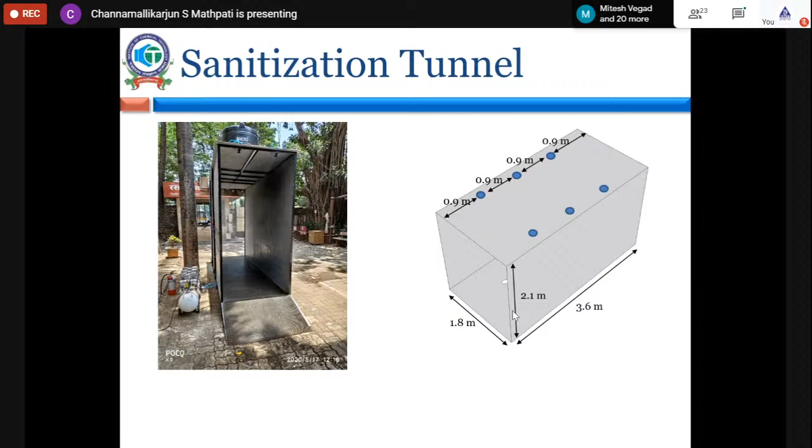So we created a virtual CFD model for this and carried out simulations at various locations of these two fluid nozzles. In this simulation, we took a human CAD model, and on this CAD model, whatever droplet flow was in the system was evaluated. We carried this out by taking multiple cross sections at head height, chest height, and knee height, measuring how much surface coverage we can get at what kind of droplet flow rate. Then we optimized this system in terms of the total liquid that has to be consumed, as well as the speed one has to maintain in the sanitization tunnel. So this is how we used a Lagrangian simulation framework to optimize this kind of system.

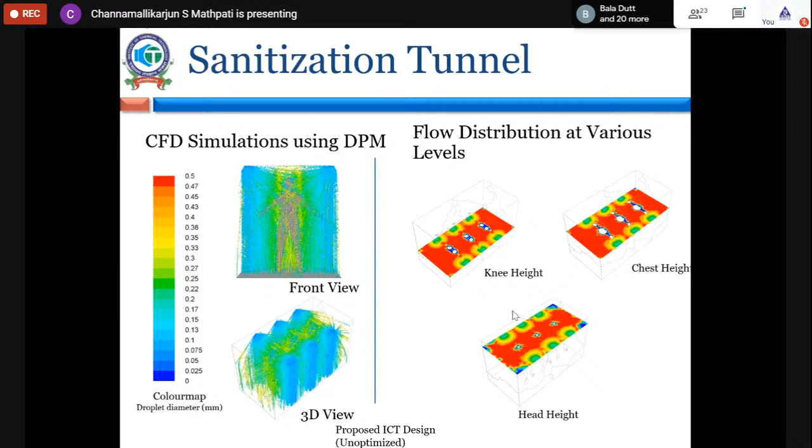So let us conclude that multiphase flows are quite complex in nature. The CFD predictions can be improved by tuning the model parameters. I had not discussed in detail the tuning of model parameters, which we typically do for gas-solid systems in terms of evaluating various drag models and modifying their constants to get good predictions matching the experimental data. But that is an essential part of multiphase modeling.

CFD provides very valuable insights into transport phenomena in the system, and it is a very promising tool for scale-up of multiphase systems.